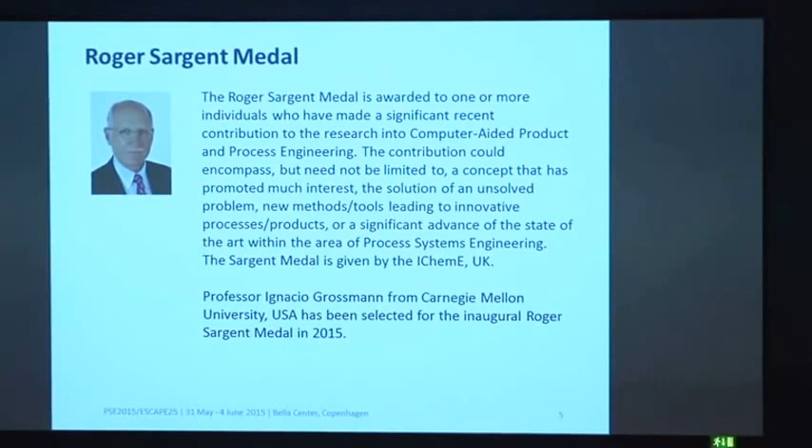And the last award to be given now is the Roger Sargent Medal. This is awarded to one or more individuals who have made a significant recent contribution to research into computer-aided product and process engineering. The contribution could encompass, but need not be limited to, a concept that has promoted much interest, the solution of an unsolved problem, new methods and tools leading to innovative processes or products, or a significant advance of the state of the art within process systems engineering. The Sargent Medal is initiated by IChemE of UK, and a panel of members was selected as the selection committee to decide the award. The process was an open nomination, and based on the nominations the panel members decided. I would like the panel members who are here to also come up, please.

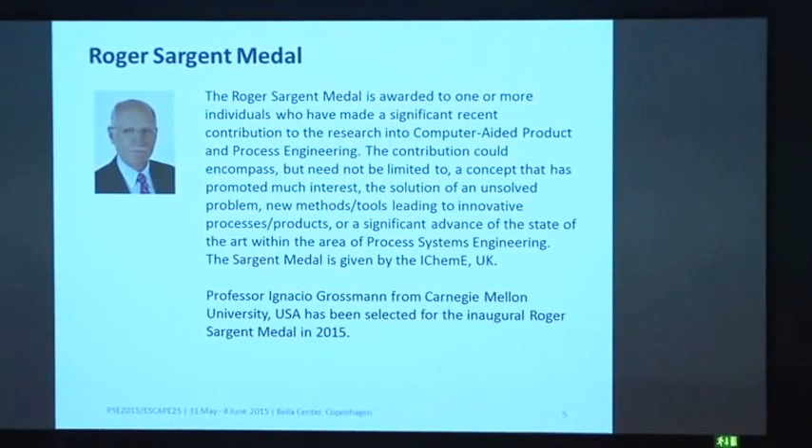And there is one panel member who was at the conference, but he had to go back. That is Professor Mannan from Malaysia. And we all unanimously agreed that Professor Ignacio Grossmann from Carnegie Mellon University is the first winner of the Roger Sargent Medal. Please, Ignacio.

There is a nice certificate from the IChemE, and a real medal also made by the IChemE. Thank you very much.

Really, thank you so much first to the Institution of Chemical Engineers for this great distinction. It is truly a great distinction and an honor for me to be the recipient of this Roger Sargent Medal. The main reason is because of the great admiration and respect I have for Professor Roger Sargent. As you all know, Professor Sargent can really be considered the founder of the area of process systems engineering. In fact, he has been the intellectual leader of the area.

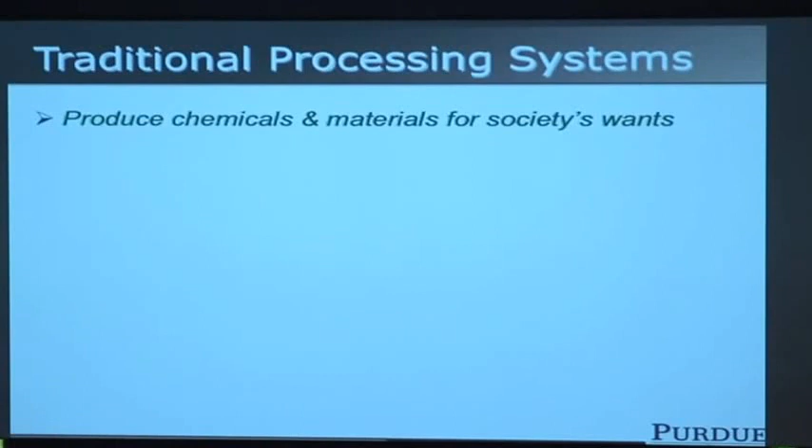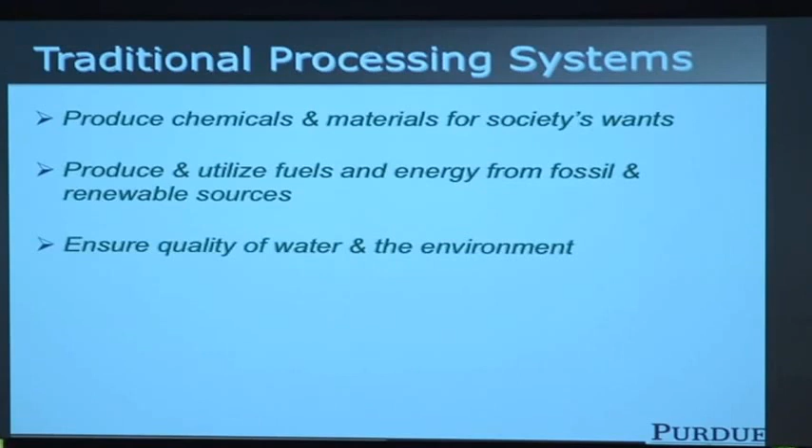The traditional processing systems our community has focused on over more than 50 years have included chemicals and materials for society's wants, fuels and energy from fossil and non-fossil sources, quality of water and the environment, diagnostics and therapies for treatment of disease, and consumer goods to enhance quality of life.

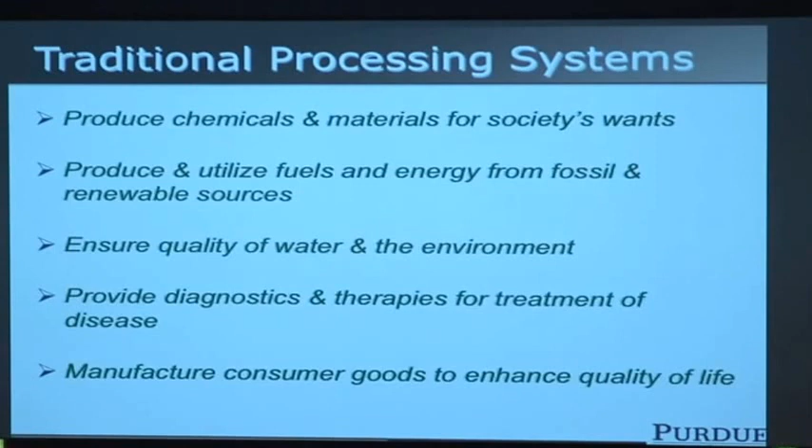Given this broad categorization of what we've worked on over the past 50 years, what has happened? What have we talked about at this conference? I've put together a couple of shopping lists, and while I won't read all of them to you, they do cover the range of topics we've discussed.

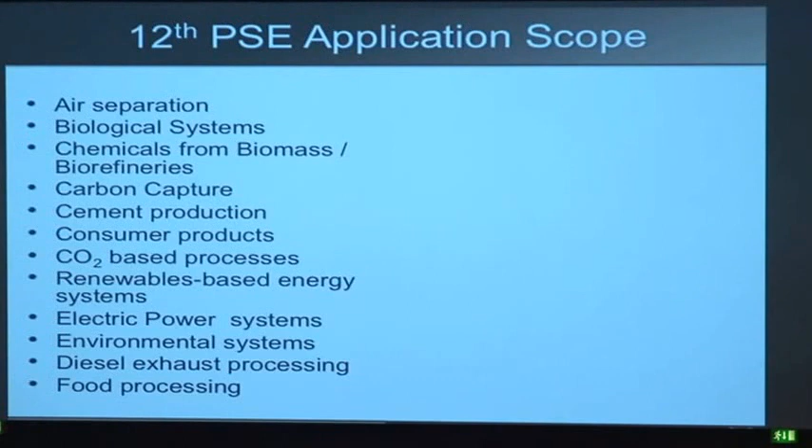This certainly includes things treated in past years, but I also view it as a kind of renaissance of process engineering. We've covered such a broad spectrum of processing operations, and particularly at this meeting, that spectrum was notable because it was pursued by all three geographic areas where PSE is practiced—lots of contributions from Asia, lots from the Americas, and substantial contributions from Europe as well.

Some of these areas have more recent focus. Certainly the biomass arena as a source for chemicals is a topic of the last few years. Carbon capture is a topic of the last few years. The notion of actually doing something with CO2, other than stuffing it into the ground, is a relatively new focus for our community.

Renewable energy systems in general—a few years ago it would have been inconceivable that chemical engineers would courageously march into telling the world how to handle electric power systems, but we're doing that with great vigor.

Those of you who attended the keynote session just a little while ago saw interesting presentations on human physiology and treatment of disease in general. The notion of pharmaceutical engineering, or pharmaceutical products and processes—we've looked at that over the years, but at this conference in particular there was a significant increase in activity in this domain.

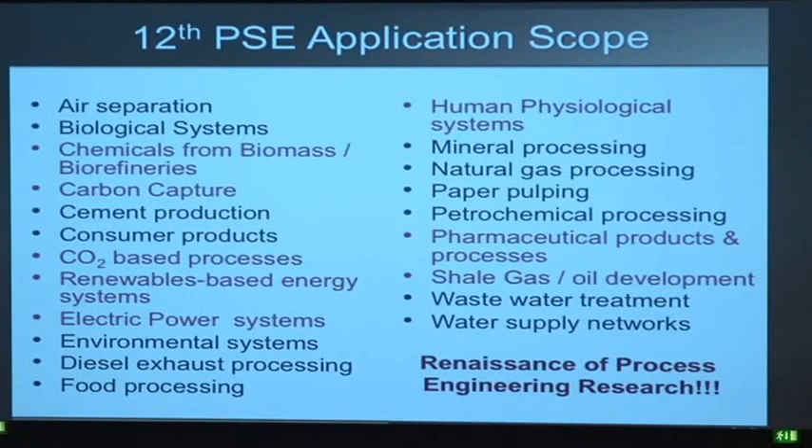The PSE community has also had significant impact over its life. If you think of the tools, the products of our research that have actually had industrial impact, certainly flow sheeting systems are there, model predictive control is there, dynamic systems modeling, process integration and synthesis in general, and process planning and scheduling, to say nothing of real-time process optimization. So these have been areas where we can actually point to delivering value to industry—it isn't just academic pursuits.

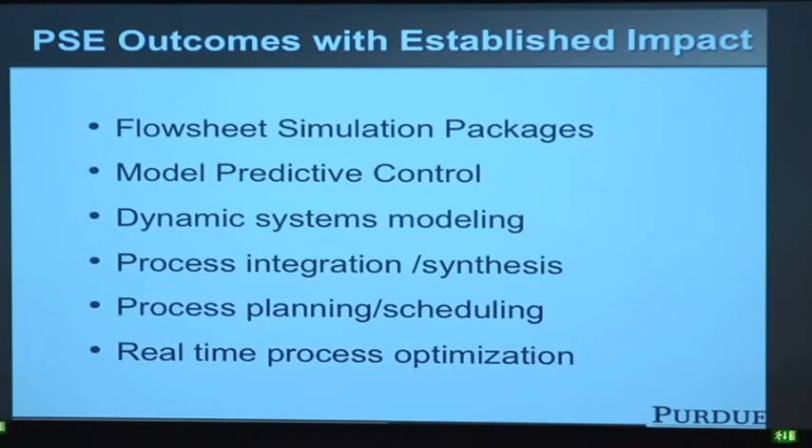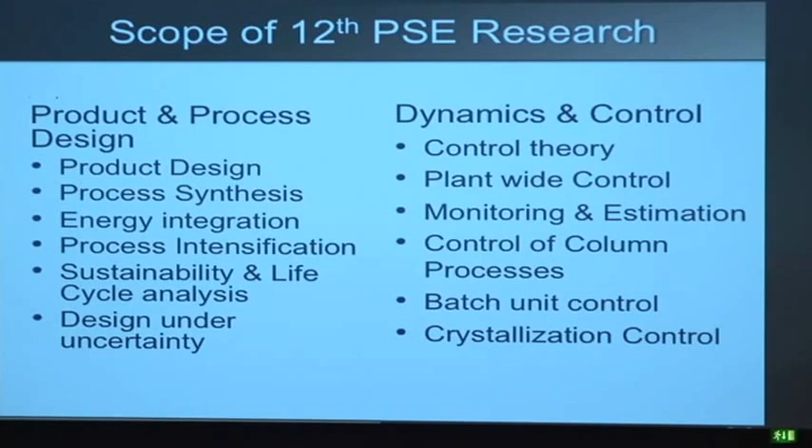So if we look at this accomplishment list, we can see what has transpired at this conference. Certainly, if you search keywords, you'll find we've had plenty of discussion of product design, process synthesis, energy integration, sustainability and life cycle analysis, which are relatively new objectives for our community. Design under uncertainty was, in fact, the subject of the lead plenary. On the dynamics and control side, control theory, plant-wide control, monitoring, estimation were covered, along with control of specific families of unit operations, columns, batch operations, crystallization control.

Among those, I would say the area that has particularly seen emphasis at this meeting has been product design. Product design has not been a new topic for us; it's something we've been pursuing for 20 years. But I was struck by the fact that at this meeting we really had quite a concentration. Those of you that attended FOCAPD a year or so ago know that concentration was much smaller.

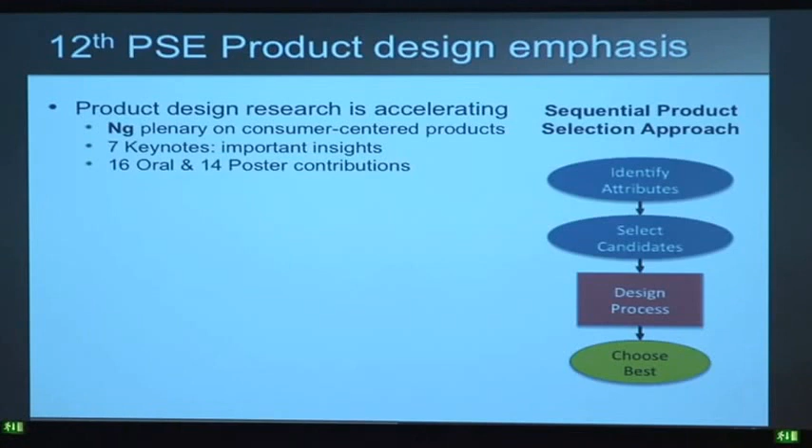Here we had a very interesting plenary presented by Professor Ng. We've had at least 7 keynotes and some 30 individual contributions. Most of those contributions still pursued this sequential approach to product design, which started with identifying in various ways candidates for products, then selecting from those candidates, then conducting the process design activity, repeating with the candidate list, and then choosing the best.

However, in addition to that, I thought a really important contribution that emerged at this conference is the beginnings of tools that the user community can use, because we need these kinds of tools. Envision doing process engineering without flow sheeting packages - it really wouldn't have advanced very well. So we do need tools in addition to new concepts, and I thought there were at least several presentations of tools.

Now, admittedly, the principal contributions were looking at blended products, but I think we've got some interesting work in terms of learnings on how to use molecular modeling tools to really help advance this domain.

Of course, the target is really integrated product and process design, and one would hope that we would be able to systematically replace the sequential process with a simultaneous one. But there already are papers here and there which begin to do this simultaneous product and process design. So lots of good contributions here - clearly a key area for PSE research going into the future.

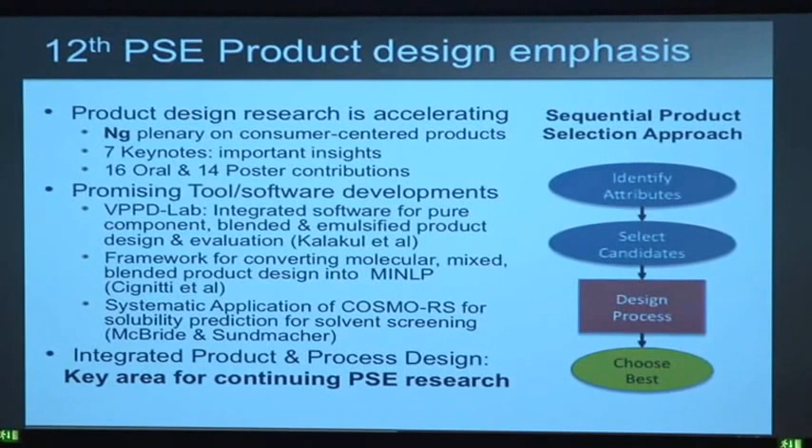Now, if we look at additional topics of scope, certainly in the operations domain, across the program of 500 papers, we've covered plant complex management, supply chain, planning, scheduling, intelligent systems. No one talked about dumb systems. We did talk about abnormal events - I guess normal events are not of interest either. And we did have some discussion of process safety.

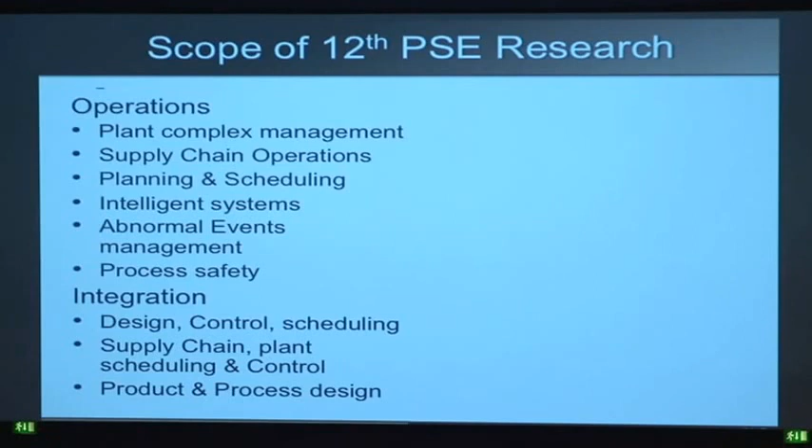Integration was very much a topic. Indeed, a very nice presentation by Professor Pistikopoulos addressing some aspects of design control integration, but also integrating from the supply chain down to the process unit, and of course this issue of product process design.

On the tool side, we've covered significant advances in mathematical programming and optimization - again, optimization under uncertainty, integration of CFD and population balances, estimation problems, and of course modeling and simulation in general. As you recall from the opening presentation from Professor Gani, modeling and simulation is the largest sector among the contributions for the conference. And we had agent-based frameworks and some things under the category of cyber infrastructure, which were principally data management and advanced computer architecture applications.

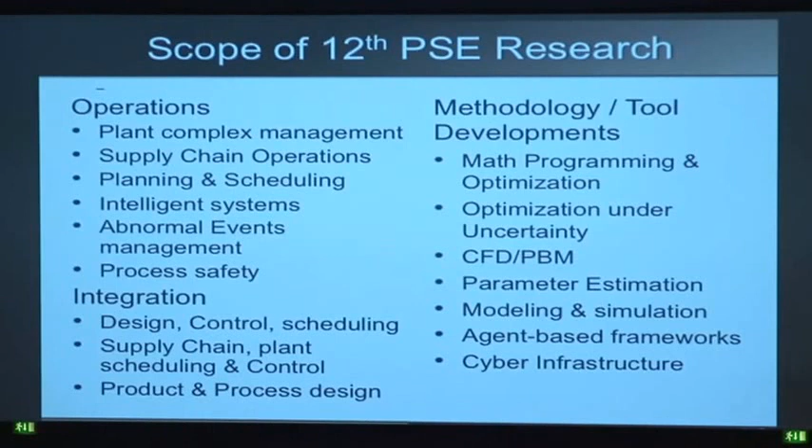Now, the area that I found particularly interesting as a theme, which emerged more strongly at this conference, is really looking at supply chain not as a monolithic entity controlled by one central player, but as multiple interacting entities that drive a supply chain. Again, this is a topic that has emerged in prior meetings, but I thought it was notable at this conference that we really had a number of interesting contributions in this area.

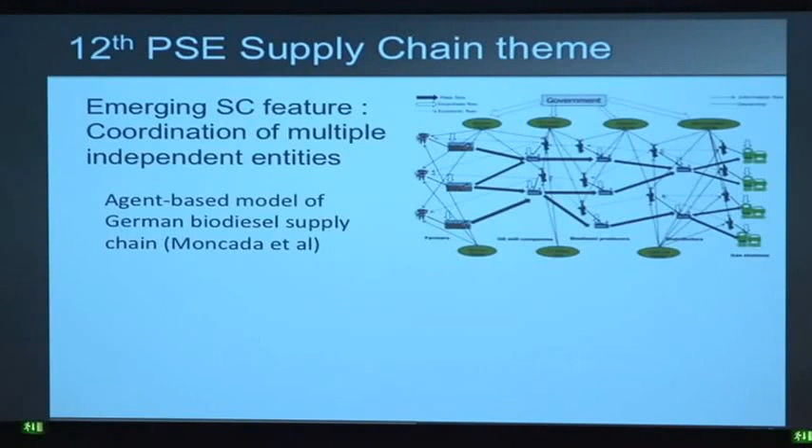And one of them used the now well-established tool of agent-based models to look at a fairly complicated supply chain - a presentation some of you may have heard on the agent-based model of the German biodiesel supply chain, which, when you look at the chart, has a number of agents in it: farmers, process operations units, distribution systems, customers, and of course the governmental agencies that regulate the various transfers that occur. But there are other presentations that really use game theoretic concepts.

I thought it was fitting that one of the contributors used the Nash pricing model, and unfortunately Dr. Nash passed away recently. It was a timely recognition of his impact on our community. There were several other presentations dealing with the interaction between at least two entities, either in determining transfer prices or sharing capacities. This is a very exciting area for the supply chain part of our community, and I hope it continues to grow because it gets us closer to reality in terms of how companies currently have to operate.

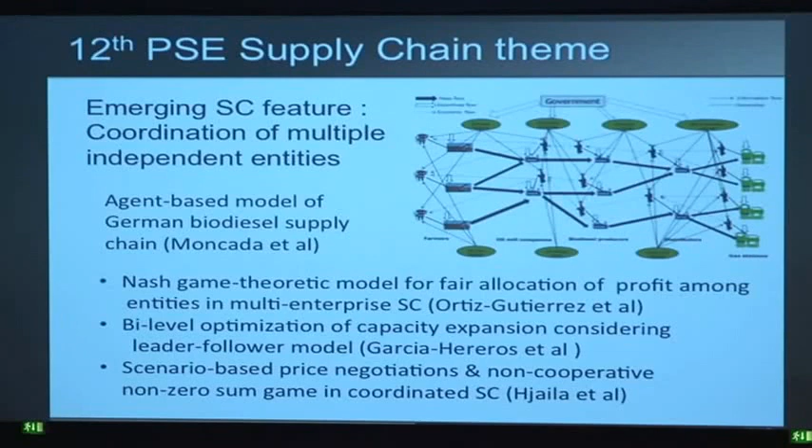Now there's a cast of characters I want to introduce, because the next phase is to go beyond general categories to identifying individual papers we thought were novel. Since this community contributed about 500 papers, I decided it was appropriate to launch a paper mining project, the equivalent of data mining, but on papers.

I was happy to engage three colleagues, Carl Laird, Zoltan Nagy, and Fenke, along with myself, in this paper mining activity. We used a range of techniques, very sophisticated AI learning tools and innovation discovery methods, and also old traditional methods like reading papers and listening to presentations. So we clearly used a collection of skills and tools to achieve this.

And so we came up with a list of 12 papers. This was a very scientifically put together list, so it is beyond question. I've divided them into 4 categories. The first is design.

Of these three, we only have time to talk about one, so I'll summarize for those who weren't at the presentation. Basically it addressed purifying an ethanol water mixture created from biosourced material, in an energy efficient way, recognizing that the conventional three-column system used to get high purity ethanol is known to be very energy inefficient. So what they proposed is an innovative divided wall column design.

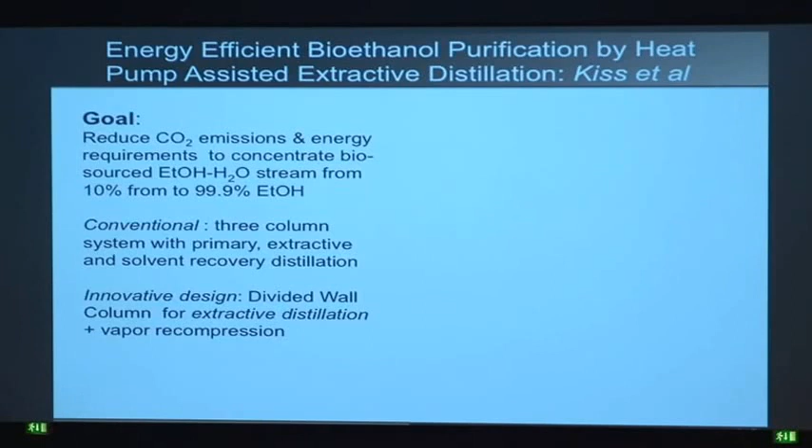This is interesting because there haven't been that many applications in extractive distillation. They really did extractive distillation, and also used vapor recompression, coming up with a very interesting system that could also be called process intensification, because it combined all three distillations in one unit. By using vapor recompression and a side reboiler, they came up with a very efficient design.

In fact, it's quite impressive that they were able to reduce the energy requirements substantially, from about 2 to 1.2, which is really needed for bioethanol to be a sustainable product of biomass. We collectively thought this was a very interesting example of how PSE can solve practical problems.

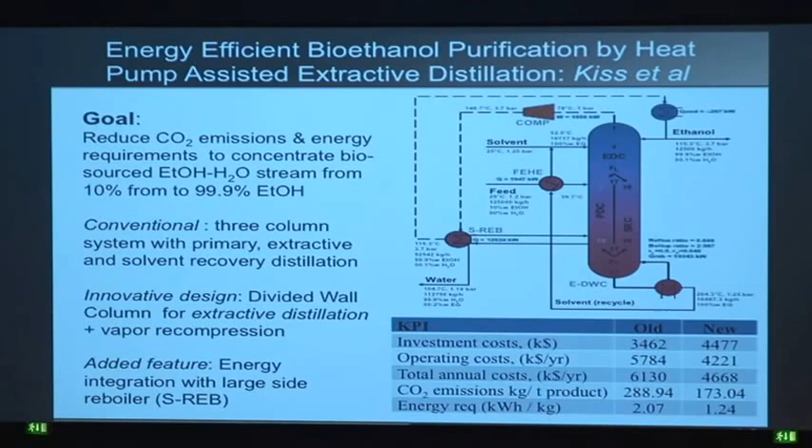Now in the area of control, we identified three contributions. One was the integration of design, control, and scheduling by the team led by our cross-Atlantic collaborator, Professor Pistikopoulos. Not only his main presentation, but three application papers appeared in the program in various forms that use this concept.

There was also an interesting contribution - my name is on it, but I assure you I had not much to do with it. It's really colleagues at the Polytechnic Institute in Milan who put together this concept of combining the design and control of a batch system. The third was a paper given very capably by Professor Skogestad, which elegantly summarized a systematic approach to plant-wide control.

We really don't have time for me to walk through all of these. I encourage you, on the plane back, if you haven't read this, read it, and contact the authors for the full-length paper. But I'll briefly summarize, borrowing from Professor Pistikopoulos, the main contributions of this work. I like that the research group not only put together the intellectual ideas but actually delivered it into a form which I'm sure he'll freely share with the entire community. All you have to do is send him an email, and he'll let you download it from his Dropbox.

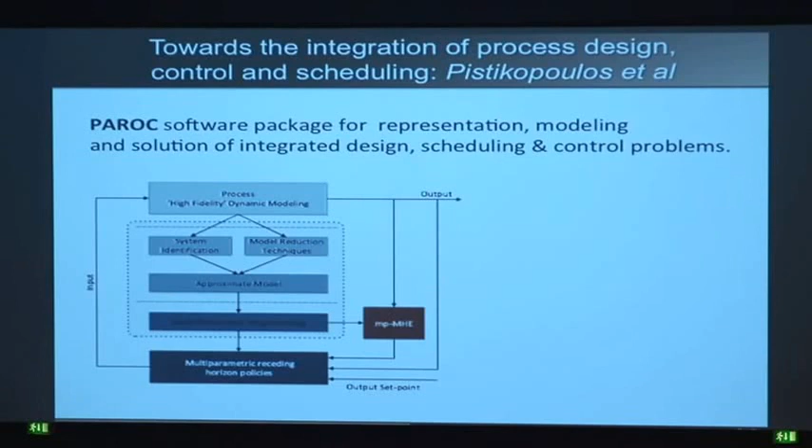It's an interesting toolkit built around multi-parametric optimization, which Professor Pistikopoulos has pioneered over the years, but it also includes capabilities for building rigorous simulation models. I was really surprised to see gPROMS was used, I thought for sure they'd use MATLAB or something like that. It had a toolbox for producing reduced order models, the multi-parametric part, and linking this together into potential MPC formulations, allowing this to be validated against the high fidelity model. I think this is really a nice body of work, conceptually, methodologically, and in delivery, and I'm sure Texas A&M will distribute it worldwide, no problem at all.

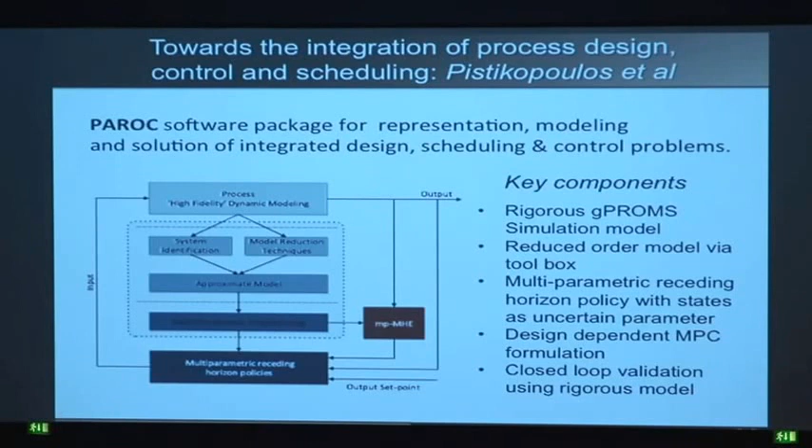Now, the third category was operations, and again there are three contributions our team identified. The first was the duality-based approach to bilevel optimization, presented in the context of capacity expansion, but really an important general concept. As I pointed out earlier, it helps address some problems in this multi-participant supply chain environment, for example.

There was a very nice summary paper by Professor You that addressed the use of mixed integer fractional programming for a series of applications. And third, there was a paper on scenario-based price negotiation using game theory from the group at UPC.

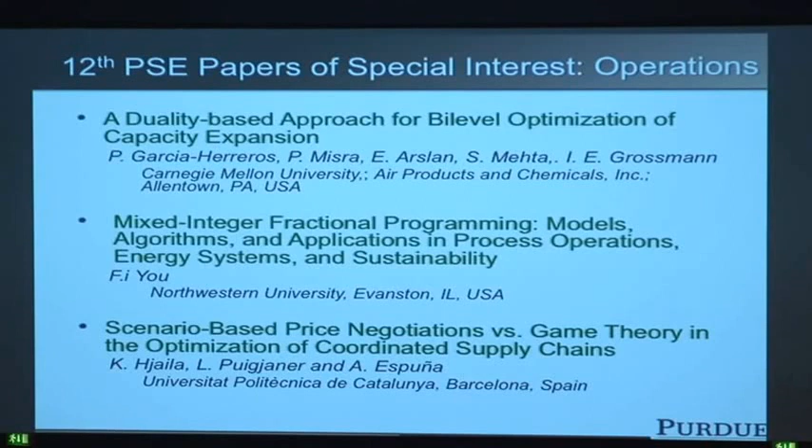I'll pick one of those to summarize, the contribution from Professor You's group. Essentially, the notion of a fractional program allows one to address problems in which the objective function is a ratio of rational functions, and it arises naturally, for example if you're optimizing a batch process over cycle time, or maximizing return on investment, or doing life cycle optimization and so forth.

While the basic idea is remarkably simple, you convert the ratio into a parameterized function, and deal with this parameterized function as an approach to optimizing the original objective function. Professor You has addressed this problem for a few years now, but I think we've discovered he's made some significant contributions here.

First, in convergence conditions that show you don't have to solve this effectively root-finding problem to optimality, you can do it approximately, which saves a lot of computation time, but also addressing the issue of global optimization. So this is really a piece of work that not only further develops the methodology, but also expands the range of applications.

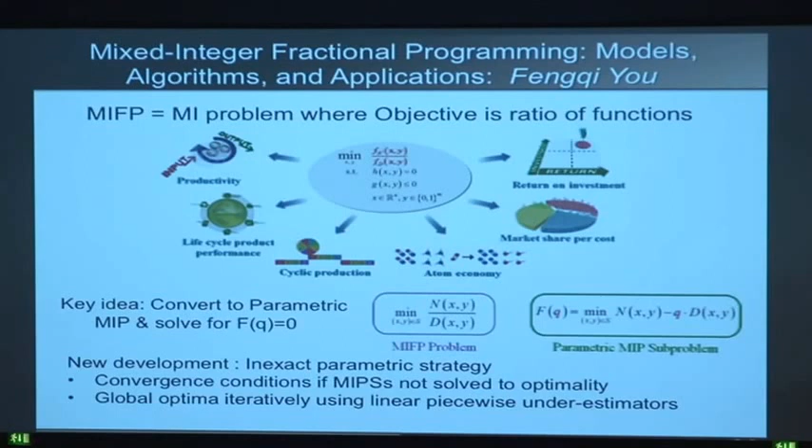Then we go to the optimization numerics world. Again, one of the really interesting contributions was from Professor Adjiman's group. They looked at identifying transition states and using that as a vehicle within global optimization, a really important contribution in advancing global optimization.

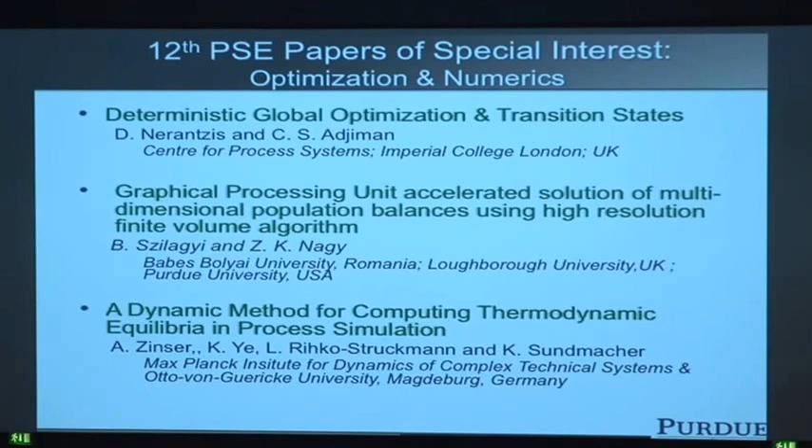There was a use of GPU units to accelerate the difficult computations involving population balance computations. A third contribution introduced a dynamic method for computing thermodynamic equilibrium in process simulation. This paper actually appeared as a poster paper, and I'm not sure how many of you managed to find it, but I think it's a very neat concept, so I wanted to spend a little time featuring it.

The basic idea is how to improve the efficiency and reliability of phase and reaction equilibrium computations, which are typically nested within simulations. The goal of this work was to improve the reliability of those computations, because the free energy minimization is typically handled as solution of the optimality conditions.

So you're converting it to a set of nonlinear equations. The phase equilibrium, likewise, since you're simply equating free energy, you essentially end up nonlinear equation solving, and we all know nonlinear equation solving typically has difficulties with initial values and convergence. So the idea the group proposed is really a pretty old one.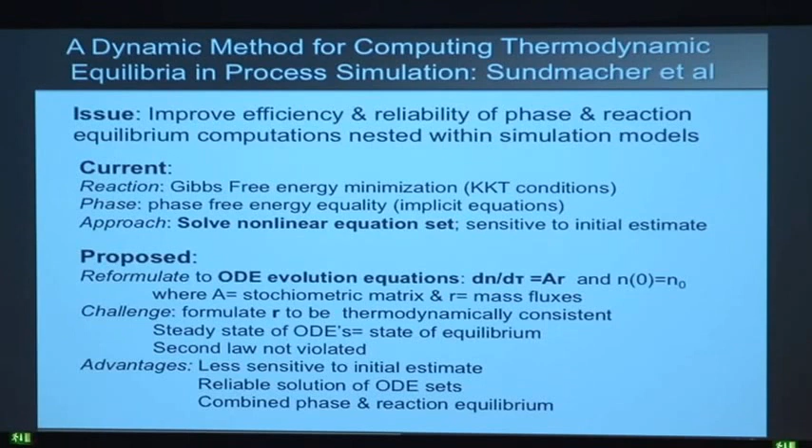At least it's been around as long as I have. But I thought the application of it is quite nice.

The idea is to take this equation solving problem with unreliable convergence and turn it into integrating a set of ODEs. And then, of course, the trick is how do you convert those ODEs into something that's reliably solved, which they did by formulating this appropriately and making sure the second law isn't violated and all that sort of stuff.

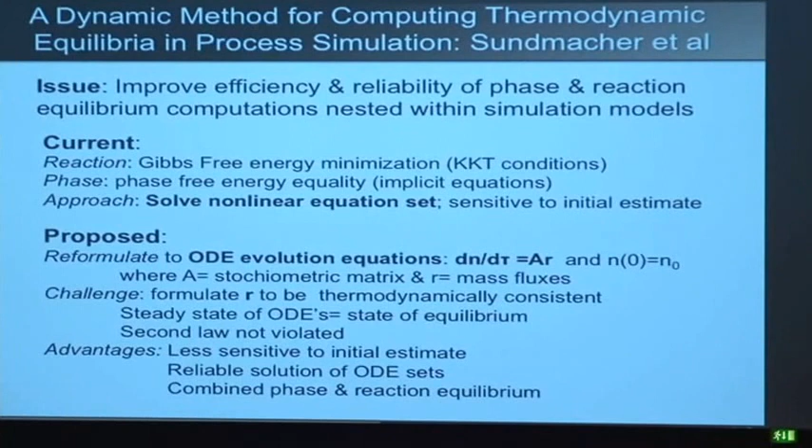Now, the advantages, as I mentioned, were less sensitivity to initial estimate, more reliable solution by taking advantage of efficient integration tools, and also the possibility of really allowing a combination of these calculations, phase and reaction equilibrium, to be carried out. So really a classical method has been used in other settings, applied to a problem that hopefully will have impact in simulation.

So, having gone through these 12 featured papers, the last phase of what I wanted to do is focus a bit more on things that we thought needed more attention, and then finish off with some directions for future research. And certainly the one area that...

keeps requiring attention from our community is that of safety and design for safe operations. It's been talked about in our community for a long time. We have been encouraged to do things in this area, but it seems like the progress has been relatively slow. But at this meeting, there were some 7 papers that addressed various aspects of process safety.

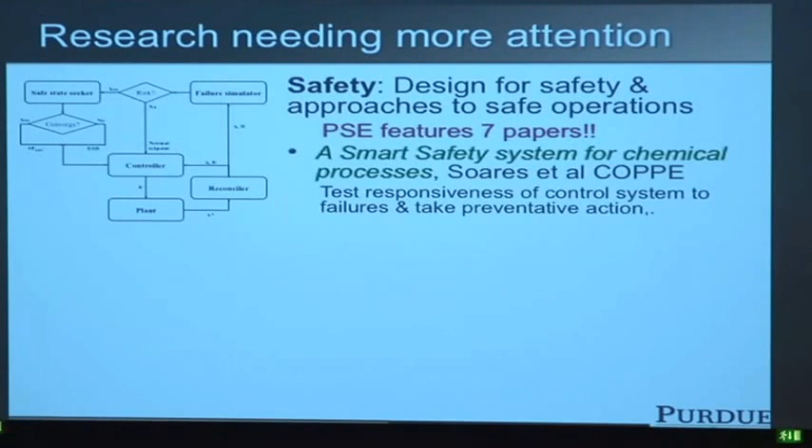For example, there was an interesting contribution from Rio that talked about incorporating safety in the design of a control system—how to test the control system for failures and take preventative action. There was an interesting contribution from our host institution that looked at how to integrate safety considerations in the workflow associated with design. And then there was an interesting presentation given by Professor Srinivasan from IIT

that really focused on an aspect of process safety that, to my mind, hasn't gotten all that much attention in our literature in the past, and that is really the human factors.

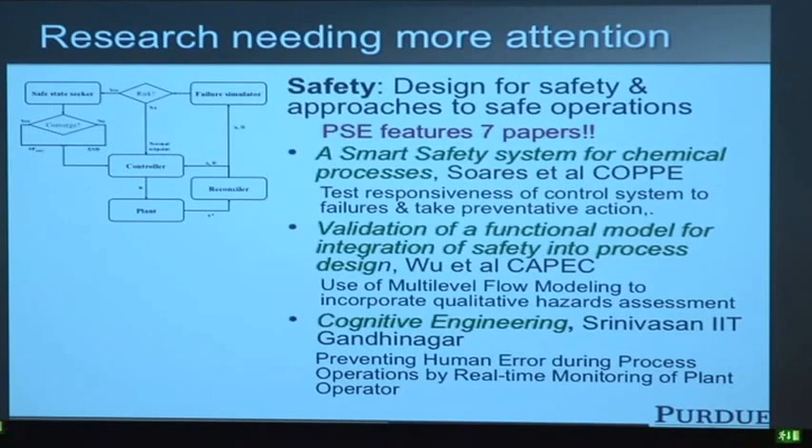And I was struck by the fact that Raj was pointing to the fact that many of the major accidents that have occurred have actually been because of human failure. And certainly the recent train wreck outside of Philadelphia was another example of really human failure, the operator simply going too fast. So I think we had some interesting cases that were presented here.

And I think the message here is we're making progress, but we really need to move a lot faster, because safety—it seems to me you can't talk about life cycle and sustainability and not really deal with safety squarely from design through operations. Okay, so that's an area that needs more attention.

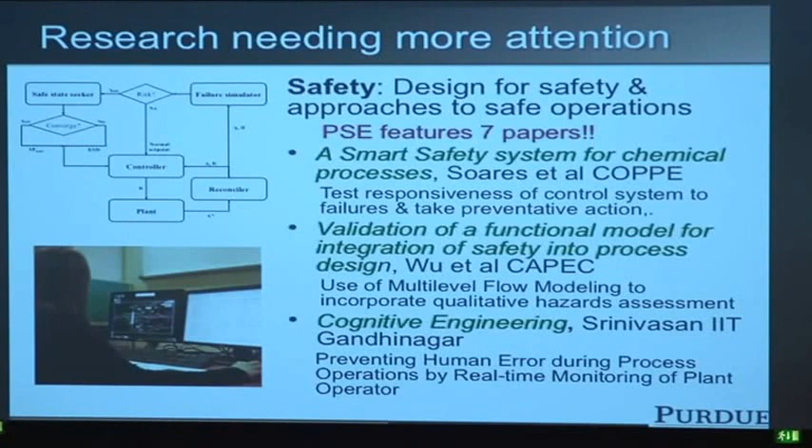Another area that needs more attention, and I guess I'm sort of harping on this subject repeatedly, is we really haven't done enough to take advantage of advanced computer architectures. And there is no better example than those of you that may have read

the history of developments of CPLEX over the years, where yes, since that software has been used, computing has improved, but actually it's the algorithmic improvements, the cuts and the various heuristics that are built into it that really account for most of the improvements in the size of problems we're able to address. So that suggests to me we really need to invest more in this area.

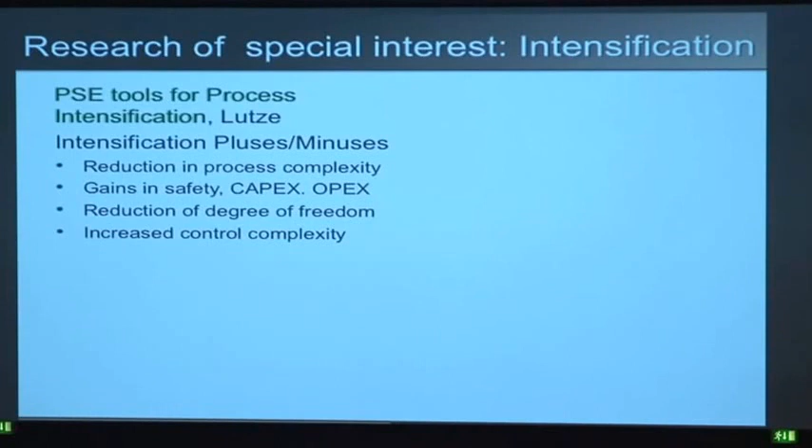It does have some minuses in that you reduce the degrees of freedom and control becomes more complicated. But this is something our control community always applauds, because it's not interesting to do control research if control isn't complex. That's the trade-off. There have been examples of continuous baffled crystallizers, reactors, divided wall columns, and so forth, but the challenges there are again those of modeling and dealing with more complex systems.

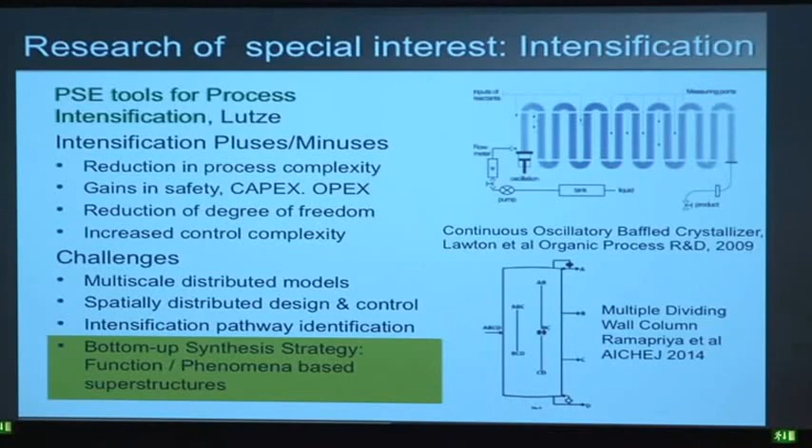Inherently there is, of course, intensification pathway identification required. And the really interesting subject, which Professor Lutze touched on—I guess Dr. Lutze now, if I recall his slide he's migrated to a company—is really going back to synthesis based on phenomena rather than synthesis based on existing hardware. Several people have raised this issue, and it was good to have it raised again. I really do think it's a very important area.

And indeed we need to do some work, because there really hasn't been that much adoption in industry. The problem is it's often said that, for example, microreactors are wonderful because scale-up is just numbering up. But of course when you number up, you lose economy of scale. So you have to make a good case for it.

It has challenges in terms of having to consider the whole thing at once, and that's not always possible.

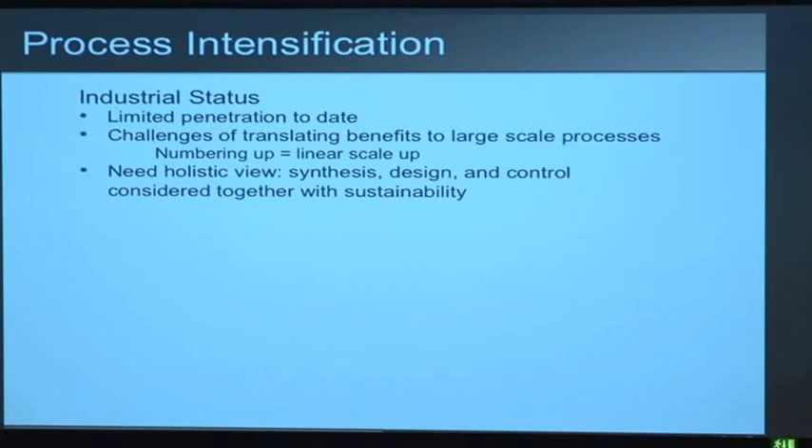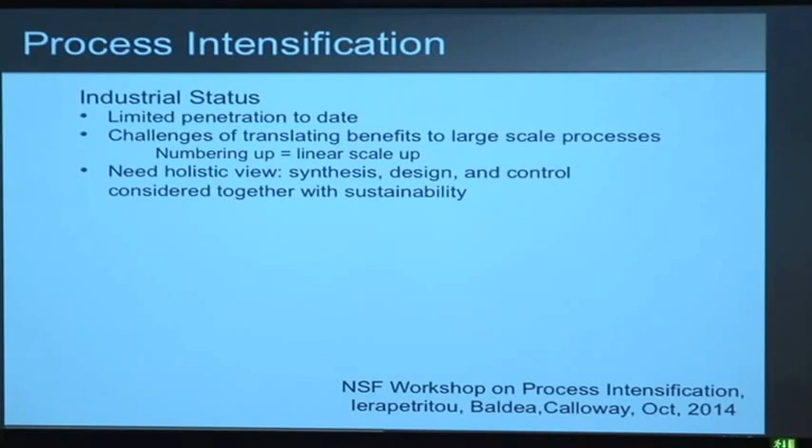Fortunately, Dr. Burka championed a workshop that the NSF conducted in early fall 2014, led by Professor Ierapetritou and Baldea. They really looked at the research potential in this area and identified a number of opportunities where process intensification could have real impact. I'm not sure whether that report is out yet, but I'd encourage you to go to the NSF website and take a look. I thought it was very timely that this topic received attention.

I think it's a very productive area for our community because, as I pointed out earlier, it requires integration and it requires a careful look at how you do control.

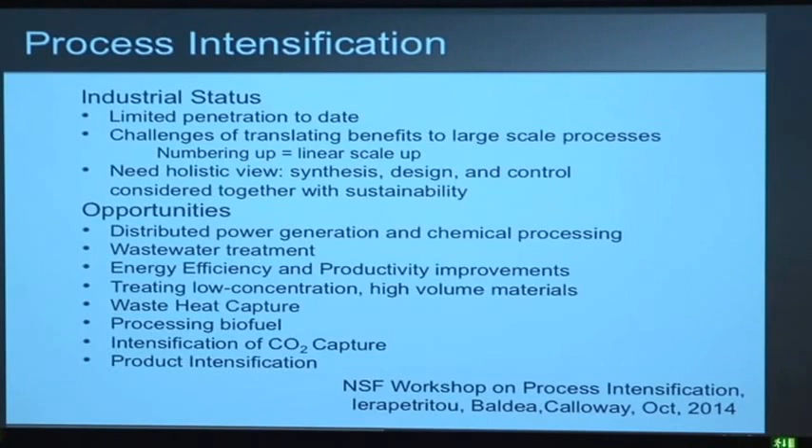The big data subject we're all aware of—we get inundated with information about it. The characteristics described in the public literature are that big data is big because of the volume of information, the speed at which it's generated, and the variety in which it's generated, and it's generally viewed as unstructured data. Our community loves structure, so perhaps we can take advantage of what's going on in this field and add our ability to structure it.

At this conference we did have some contributions in this domain, certainly a very interesting presentation by Professor Zhao from Tsinghua University, who described activities he's doing with major companies in China involving extracting abnormal situation management information from plant data. I think that's actually a topic that Professor Cedar also attacked a few years back, but it needs more effort than just a couple of lone rangers, so I think it's an important area.

We've also had a number of contributions, on the order of 4 or 5 papers, that worked on the notion of using ontologies, essentially to create a framework that allows data to be better structured and then searchable.